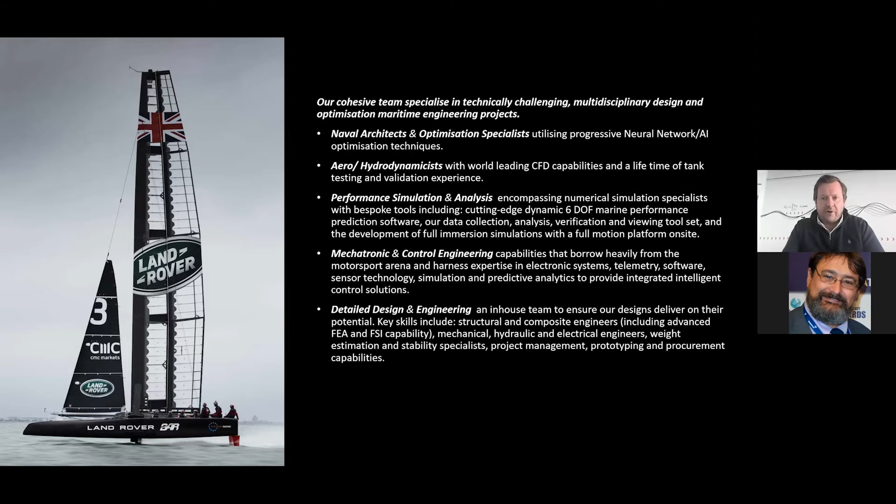As a business, we are entirely focused on sustainability, with the majority of our projects looking at reducing greenhouse gas emissions and CO2, so WindWings being one example.

We're also heavily involved in the crew transfer industry for CTVs in the wind turbine industry, where we have developed a new product range which is reducing emissions by up to 30% and decreasing vertical accelerations by 70%, and obviously increasing crew comfort.

But the shipping industry has this big challenge ahead of it, and the reduction of CO2 in line with the IMO's requirements. We want to play our part in delivering solutions to help that. I don't think there will be a golden bullet to solving the problem, and it's going to be a case of combining lots of technologies to give not only a solution which reduces the greenhouse gas emissions, but also reduces them in an economically viable way.

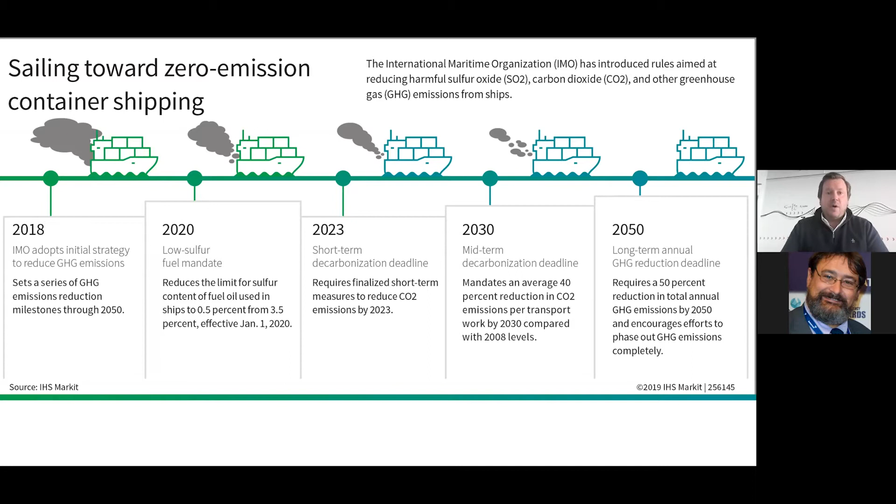So I talked earlier in the presentation about our 6 degree of freedom VPP, which isn't a variable pitch propeller - often I get corrected on that in the shipping industry - but it's the velocity prediction program. The version we've developed specifically for ships, not just for wind technology on ships but ships as a whole, is developed as a performance digital twin, which optimizes live and accurately simulates the interaction between multiple complex elements on a ship.

So hulls, propellers, rudders, wind in this case, and the effect that has on engine loading. It allows us to simulate and holistically model the performance of a ship, and then we integrate that into an in-house weather routing routine, specifically developed for wind-assisted ships, allowing us to give statistical analysis on the savings we can make on a specific route for a specific client on a specific ship.

This tool was developed before we even got into the development of wind technology directly. Before we could start developing a wing, it was important that we understood what the wing had to be able to do - what was its performance profile? How did it look in terms of a physical body, as in what did we want it to do, not what did we want it to look like.

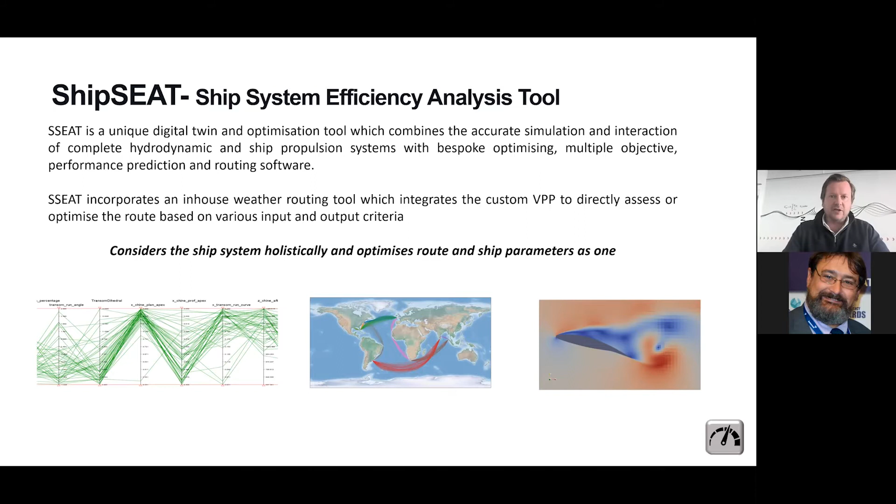And what we ended up with is a multi-element wing, and we'll see an example of it in a minute. But I always use the aircraft analogy when explaining why we've ended up where we've ended up. A single element wing, or even a single element with a small flap at the back - which is what you see in a traditional airplane at cruise altitude - is very efficient in terms of its lift-to-drag ratio.

So it creates a lot of lift for a minimal amount of drag, and in that sense it's very, very efficient. That's what you see when a plane is cruising at altitude, because it wants to fly and burn as little fuel as possible. So for a given amount of lift, it wants to minimize its drag. But this means there's a limit to the amount of lift and power that can be produced. That's the same as what we traditionally see when we develop a wing for an America's Cup boat.

We're trying to develop a very efficient high lift-to-drag device. But what we see when we use ShipSEAT to analyze the requirements for a wind-assisted propulsion device on a ship is that actually the aerodynamic drag associated with producing the lift is very small compared to the global drag of the ship. So what we're actually looking for is power and grunt.

We want to produce as much lift as possible for a given area, and we don't mind paying a little bit more drag for that, because in the grand scheme of things, that drag is still very small. To achieve that, we end up with a multi-element wing, very similar to what you'd see on an airplane. What a plane is doing when it transforms into a 3-element wing coming into land, or even a 4-element wing, is that it wants to fly slower, producing as much lift as possible for a given speed, without worrying so much about a little bit of drag, because it's only doing that at the point of landing.

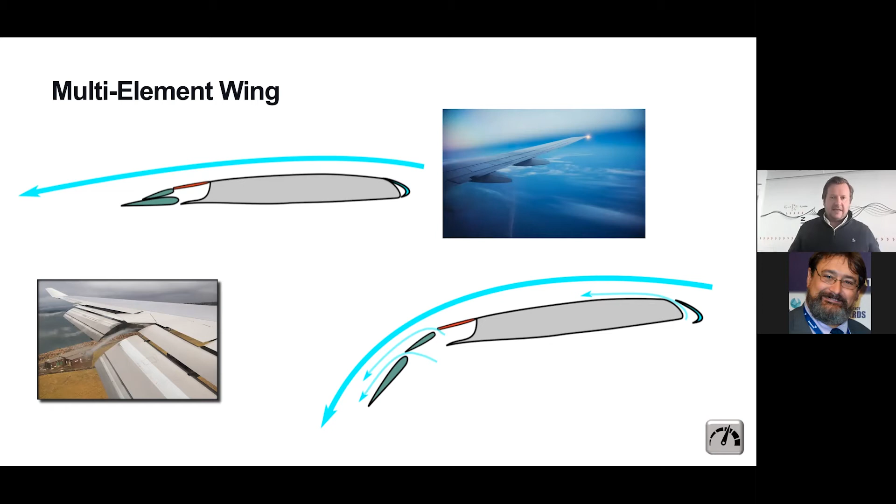And that's exactly the same philosophy we've taken. We're maximizing the amount of power, and hence thrust, that we can produce from the wing at the expense of a little bit of drag. But when you look at the ship holistically, it represents a significant net gain.

So this is our technology, and these are some examples - slightly out of date compared to the latest iterations, but this captures the concept. It's a 3-element wing where we can invert the camber, producing a highly cambered shape on both port and starboard tack, generating a lot of lift.

Safety is really important, so we have two ways of depowering the wing in high wind conditions. One is to feather it - configured so that in a total power failure with the wing up, it feathers to a zero lift, minimum drag configuration. We've modeled the effects on turning circles and minimum powering requirements to ensure we're not endangering the ship.

The alternative is we can fold it down flat, which has additional benefits for port operations or getting under bridges and other instances where you don't want the wings erected.

We're heavily involved with class, flag, and various companies looking at mitigations for visibility - working on bridge designs, the use of cameras, additional radar, and augmented reality. We're trying to bring a rounded solution to the party.

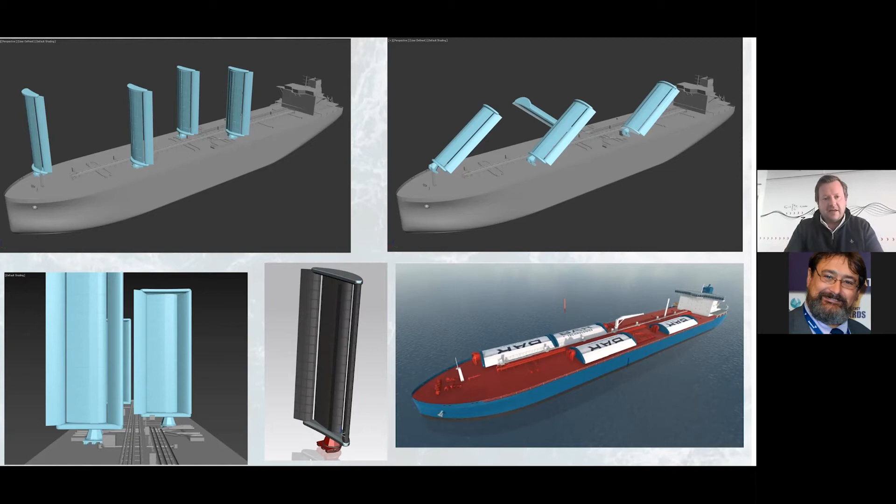We're then routing based on 10 to 15 years of historic weather data. On a typical global route, we're seeing savings on a retrofit in the high 20s, and on a new build in excess of 30% - that's based on an MR2 with 3 wings fitted.

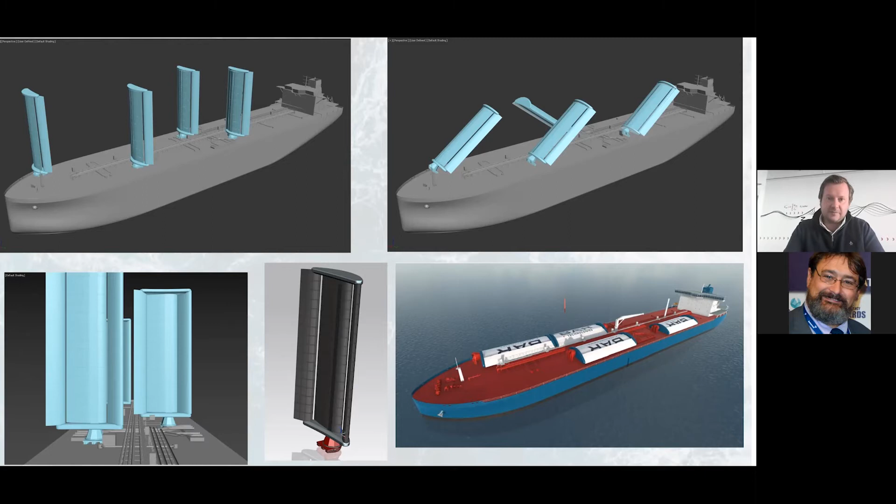To give that some context, we believe the equivalent for 4 rotors is about 14 to 15%, which plays out with what we're seeing from published data from some of the testing that's been published.

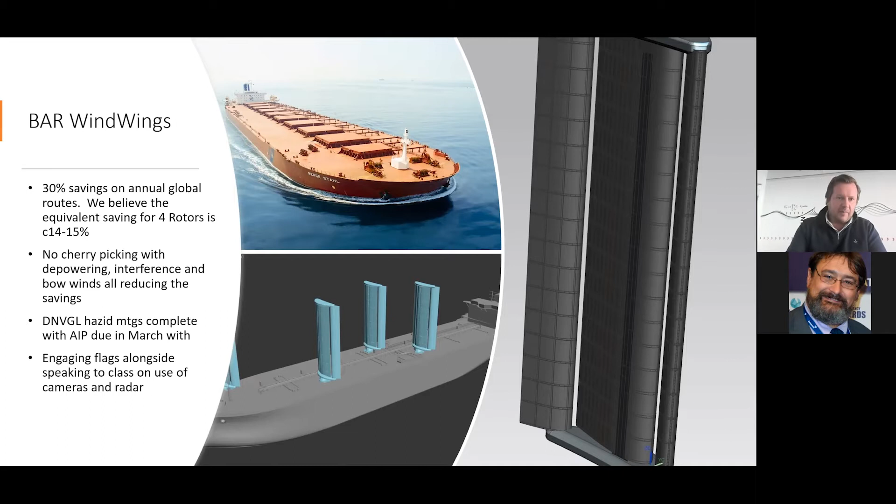So this is full steam ahead for us. I was saying before we started that we want to focus on doing, not showing - we've done a lot of work in the background. We're very lucky to have Cargill as a launch partner and technology sponsor, and the first vessels will be theirs. We're looking to get the first wing on a vessel by the end of this year, and very shortly we'll also be announcing a technology partner to help deliver the technology to our clients going forward.

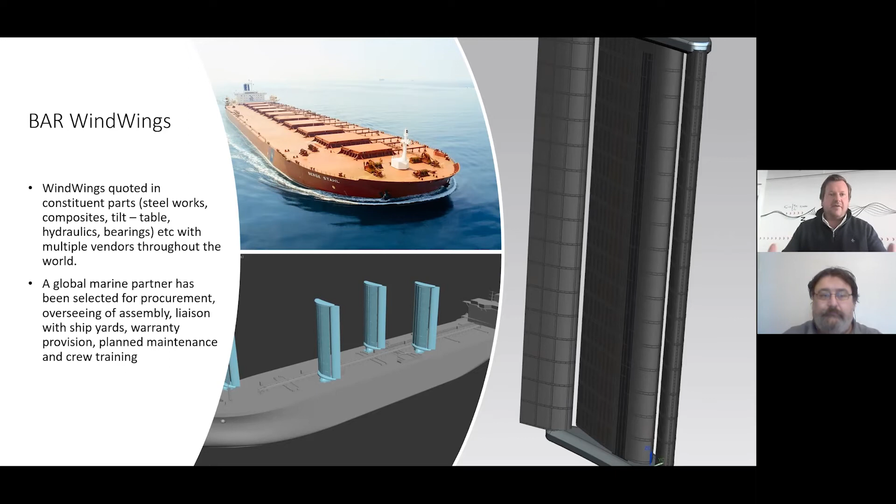Where we are at the moment, WindWings are now fully quoted in their constituent parts through various vendors around the world. We have a global maritime partner liaising in that procurement process, who will oversee assembly and installation at shipyards, and deal with warranty, maintenance, crew training, and support throughout the life of the product. We're a relatively small engineering house, so we need a global partner to deliver to the global shipping companies.

My closing comment is that we can't see the wind - it's invisible, of course - but as an industry we've got to do a better job of measuring and recognizing the performance that wind can bring. Fuel reduction versus EEDI is a perfect example: the published data for a rotor is 8-9% fuel saving, but its EEDI value is only a 3% saving. Likewise for ours, if we're looking at 30% saving, we're still only seeing an EEDI increase of 10 or 12%. So there's work to be done as an industry to ensure wind power is recognised for the huge potential it actually has.

Thank you very much, Gavin. Simon, thank you very much - very, very interesting. I can see the Spinnaker Tower there as well, and our office. Oh, very nice.

Okay, so I'm going to go on to side by side in just a second. Was that all right? Yeah, no, that's great. So I've got a few discussion points, and I think we could probably sit here all day discussing all of the aspects of this.